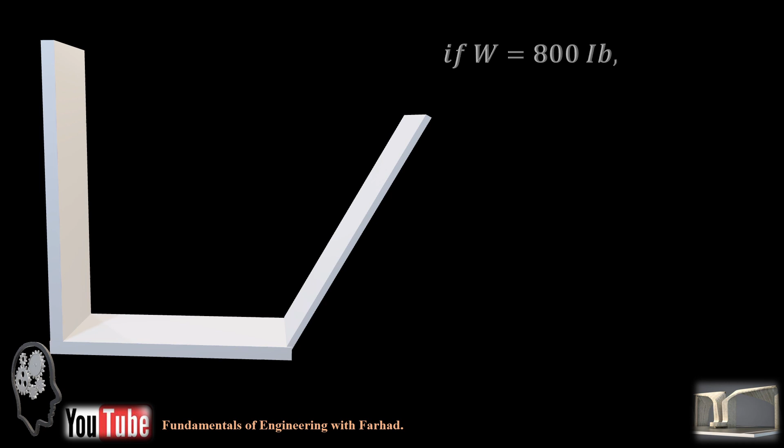Hi everyone, fluid mechanics. In this example, we are working around a body of water in a reservoir, and

there is a gate which is hinged at A, and then it's held with a cable and attached to a vertical wall. If we know the dimensions, for example, the length of the gate and the amount of water filled in the tilted direction, it's about 6 feet of water, and the angle of the tilted gate to the horizon is 60 degrees.

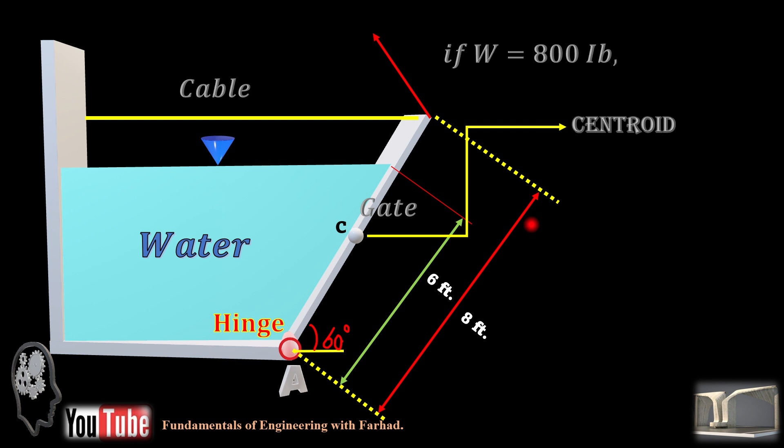And also, if we know the weight of our gate is 800 pounds, and the dimensions are also provided, like 8 feet in length and 4 feet in width, we want to know what would be the tensile force inside the cable with this information provided.

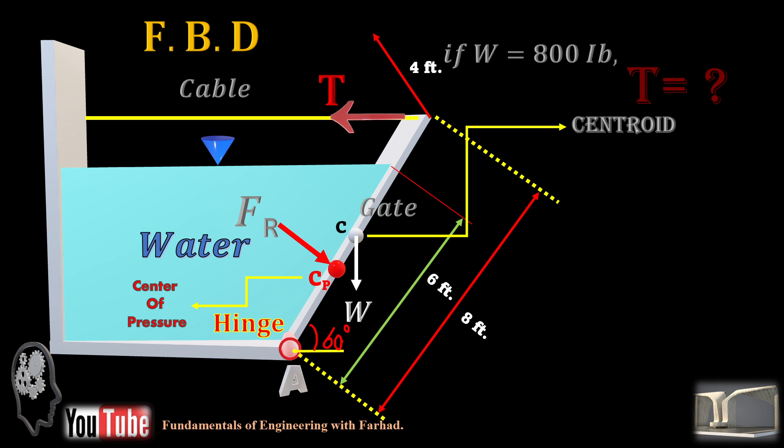Let's start the problem. So first thing to do, we need to calculate the resultant force of water on the gate, and the location of the resultant force, we do know that's the center of pressure from previous examples. So first we want to calculate the resultant force, and resultant force is nothing but gamma h bar c times the area.

Area is definitely a rectangle, which is 4 feet in width and also 6 feet in height, because we are just interested in the length of the gate which is filled with the water. So that's our area. So FR is 62.4 times.

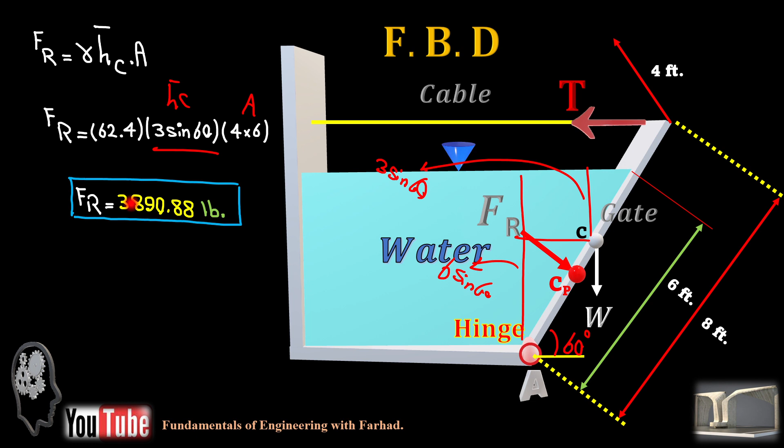So if this is like 6 feet in the hypotenuse, this is 6 sine of 60, and half of that to the centroid would be 3 sine of 60. So that's h bar c, and this is our area. So if you calculate F sub R, or resultant force, that's 3890.88 pounds. So that's our resultant force.

Then we do know the location of the resultant force. It's not the center, but the center of pressure. So how to calculate the center of pressure? YCP, the Y component of center of pressure, is equal to YC, the Y component of centroid, plus IXC over YC times area. So YC is already 3 feet from the top, and

IXC for a rectangular plate is 1/12 base times height cubed, and that's 1/12 times 4 times 6 cubed over YC times the area. If you add it up, it just gives you YCP is equal to 3, and this term turns out to be 1 foot. So YCP is equal to 4 feet.

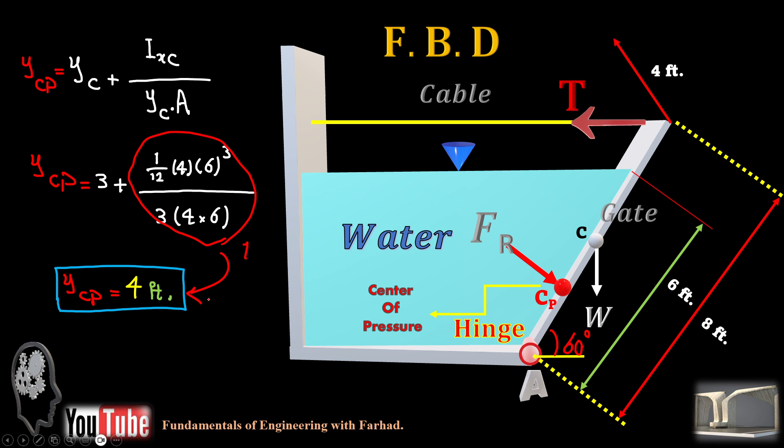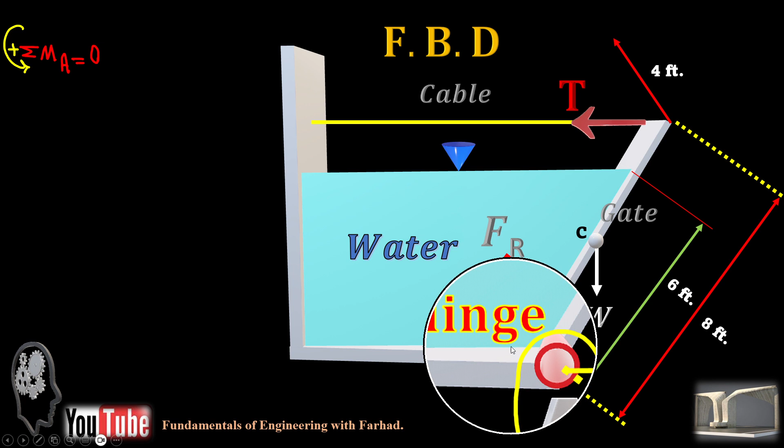Then by developing a moment about point A, because this is the hinge over here, we can have summation of moments about A equal to 0, then resultant force at X, if we consider X as the distance to the hinge. So this length is already 4 feet, so our X is 2 feet.

We already calculated that, then minus F resultant force times X minus W cosine of 60 times 4. So we are talking about this component, because the other one, if you just shift this component to here, just passes through point A and doesn't create any moment.

So W cosine 60 times 4 feet creates the moment for the weight component. Then plus T times 8 times sine 60 degrees. That's equal to 0.

And if you do so, it just gives you FR, we already calculated that part, and times 2, which is this distance. W cosine 60, we already talked about that. 4 is the centroid, the center of

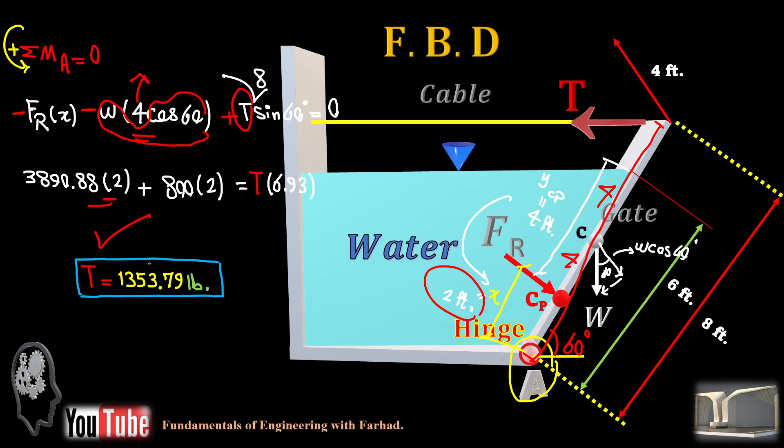mass applies to the whole length of the gate, not only the part filled with water. So we need to consider the whole length for the weight of the gate alone, and half of that is 4. That's why we use that one here. Then if you replace the numeric values, it gives you a tensile force inside the cable of 1353.79 pounds. And it was an interesting problem.

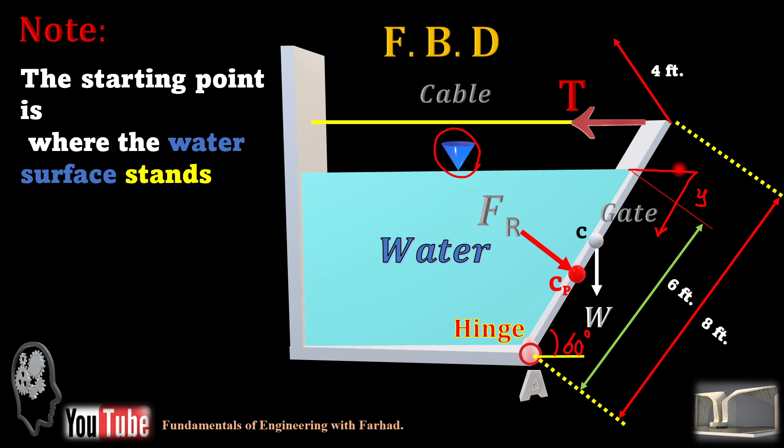The important note for this problem is after creating a clear-cut free body diagram, the starting point is where the water surface stands. So we need to calculate everything based off the water surface elevation and create our y-axis at the base of the water level. But for the weight component, we need to consider the whole length of the gate.